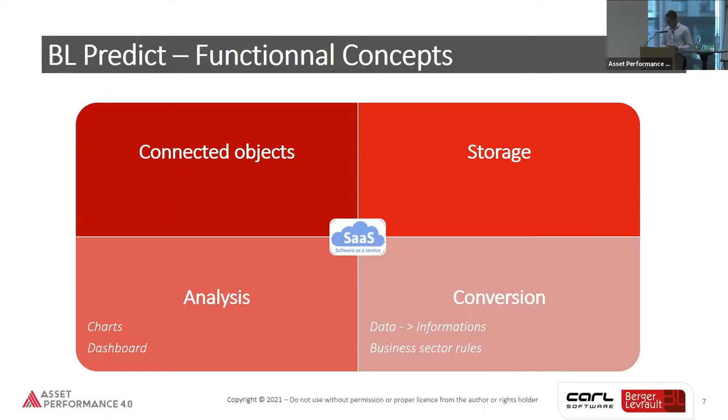And after that, to propose dashboards to make great analysis, or to have some control process on the assets with this data. The specificity of BL Predict is the use of IoT technology, a rules engine and artificial intelligence algorithms dedicated to maintenance. What you see in this slide is an architecture compliant with the new technological principles of the digital age: the connectivity between people, assets, processes, and of course existing IT systems like CMMS, enterprise asset management or other kinds of management systems.

Of course, the use of big data, but not only big data in a classical view, as a data lake with batch flows and business intelligence dashboards. No, in this architecture we have to see big data as the ability to have a stream data flow, to collect data in real time and to analyze the data in real time. Of course, the use of APIs to consume and analyze the data flow, and some business rules connected to the CMMS system.

A focus on the modules and what is necessary to go through maintenance 4.0. First of all, we need to interoperate with the world of IoT and, of course, the world of existing protocols and existing field bus automation.

There are a lot of standards that we can support. All this configuration of the connectivity is managed by what we call device management. The device management helps you, for each asset identified by a unique ID in the CMMS system or the enterprise asset management system, pair it with some sensors.

We can define the technology and the protocol to use to collect the data coming from the sensor. And of course, we can pair this existing sensor on the field with the management objects represented in the CMMS and enterprise management.

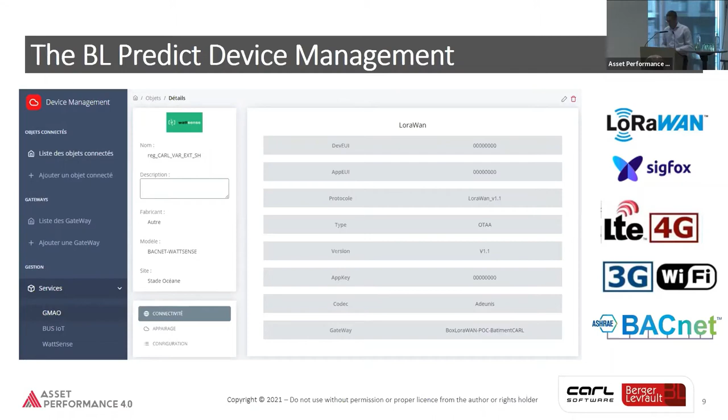By doing this pairing, we are able to control the data flow directly from the sensor to the enterprise asset management system or the CMMS system. I will show you afterward some examples of what we can do with an integration with a CMMS system. So it's quite important to have good device management to go through the Internet of Things.

Of course, we have data, so we have to analyze it and transform this data into information: alerts, events, or indicators. And we have great mixing dashboards to help you understand how an asset works, its health stats, and why it is working this way.

So here, for example, it's a mixing dashboard for an HVAC system, the heating, ventilation, and air conditioning system.

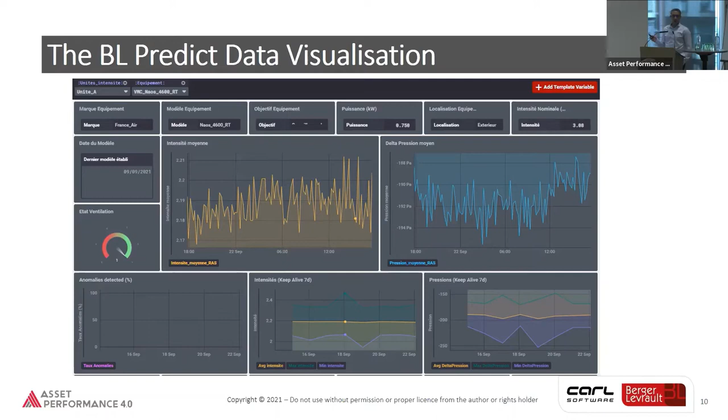And finally, the use of the API to consume data from Berger-Levrault or to consume services coming from other systems like CMMS. At Berger-Levrault, we developed and market a CMMS system called CARL, and we have a first integration with it.

When our customers are in CARL, in the tree structure, to see all the assets that are managed, we can, of course, in real time, see the mixing dashboard corresponding to this asset through the pairing system.

We are able to directly pair some sensors to some measure points in the management system, and to go through conditional maintenance with this pairing.

We are also able to launch alarms or events directly in the CMMS and to start the maintenance process in the CMMS with this triggering.

What's interesting about these alarms and events is that the use of IoT and AI helps you have great qualification of the alarms. So we don't have to fix thresholds or levels for each alarm manually. These thresholds or levels for alarms or events are automatically defined by Berger-Levrault.

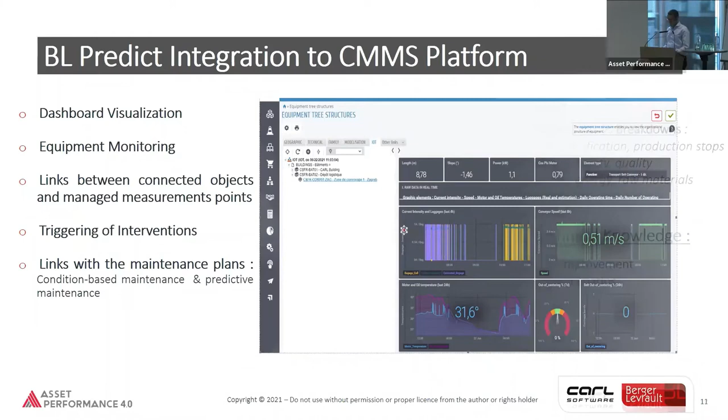So why use the Berger-Levrault platform with the CMMS? What can we do? Of course, we can go through predictive maintenance and predict when a failure occurs. It's interesting to predict when a failure occurs, but that's not the main goal. The main goal is to optimize and find the optimum.

You know there's preventive maintenance and corrective maintenance. Preventive maintenance is quite interesting, you can have zero failure with it, but at high cost. With corrective maintenance, it's low cost, but when a failure occurs, it could be very dramatic, and of course very costly.

So for each use case and for each asset in a specific context, we look for the optimum of maintenance. It's the balance between the maintenance costs, breakdowns, security, and globally the performance of the assets.

Another interesting thing is by making correlations between the data coming from the field, from the sensors, and the knowledge in the CMMS systems, we can increase the technical knowledge of the use of assets in a specific context. By this, we can define maintenance plans adapted to specific degradation scenarios.

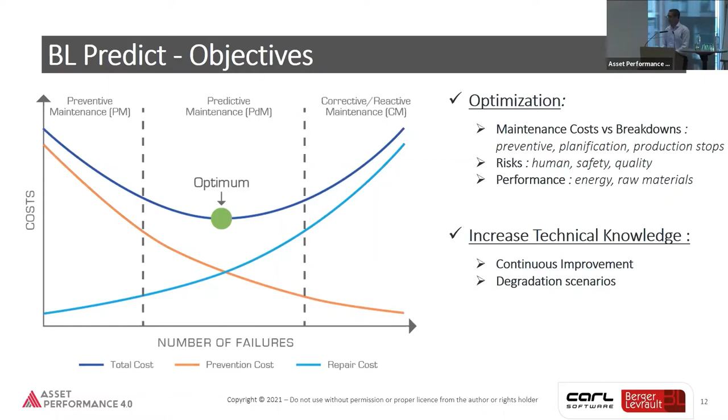A quick focus on the process in Berger-Levrault to do this. There are three main processes.

First, the monitoring. With the monitoring, we can make some auto-diagnosis. With this auto-diagnosis and the knowledge coming from operations and all the data coming from the enterprise asset management or CMMS or other management systems, we can go through prognosis.

And with this prognosis and the financial KPIs of your maintenance activity, we can go through and help give recommendations to help you make decisions on how to build your maintenance plan and manage your maintenance activity to find the optimal.

To do this, there are three main techniques. The first, to make the monitoring processes and the diagnosis, is to automatically detect anomaly in the data. When we mix the data and information coming from BL Predict with the management system, we can go through some classification models to identify some running modes that are bad running modes.

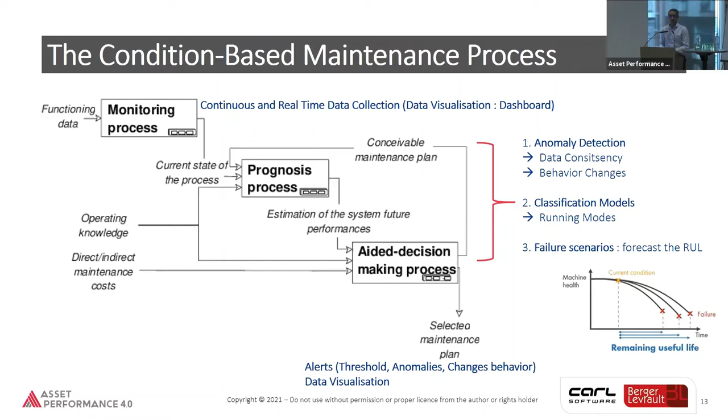So we have a predefined algorithm made by our research team, and it's an agnostic algorithm to detect anomaly and to make a pre-diagnosis based on the data coming from your sensors.

We can, when we detect this anomaly, qualify it in 3 levels. This is an anomaly of the sensor, because the sensors can have anomalies. This is anomaly, it's a local anomaly, so it's an anomaly for example only one signal. And it's a global anomaly, so in fact it's a kind of symptom for the asset or the system.

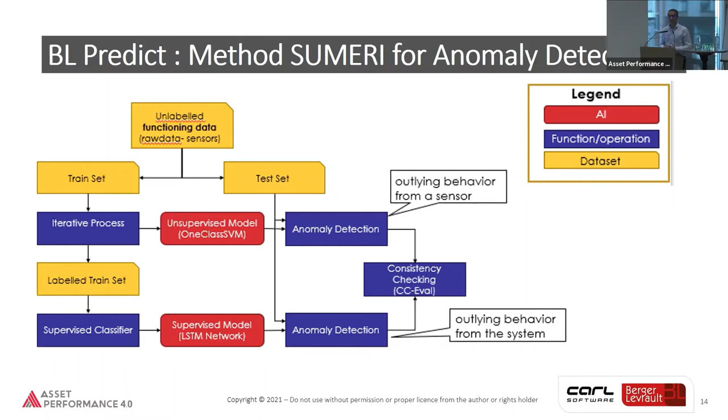Of course, this algorithm, which is called SUMERI, was designed by Berger-Levrault, but you can also use in BL Predict some more classical statistical algorithms that are used by many method and maintenance teams, like ARIMA, to detect change or anomaly in signals and in fact in the behavior of your assets.

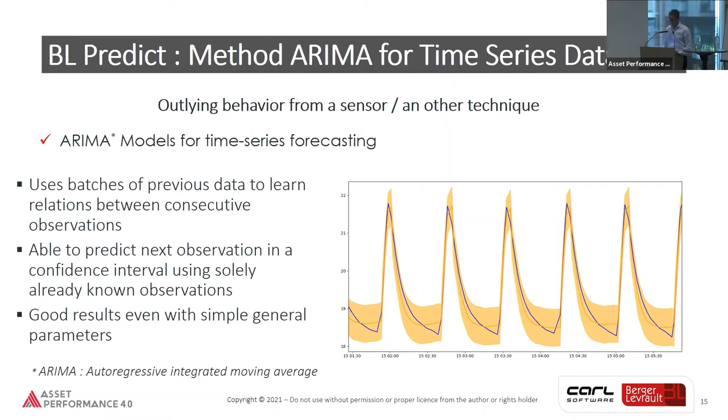To finish on BL Predict, what are the fields of application? So you understand that BL Predict is not a general IoT platform, but a very dedicated IoT platform for maintenance.

So BL Predict is well suited for facility management, because it's coming with predefined configuration, tools, dashboard, and algorithms for facility management - for wastewater, pump follow-up, level control of meters monitoring, or air conditioning systems.

And it is also well suited for some industrial assets, with some algorithms dedicated to vibration, electrical motor analysis, oil control analysis, sound detection, and the ability to detect some behavior of the assets when it is in exploitation.

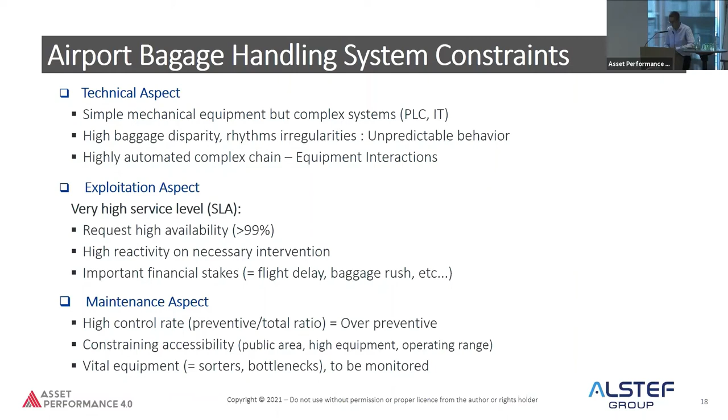Also, as Alstef is the manufacturer and deployer, and as I said, they also market services like maintenance services for the airport baggage handling systems. They are very interested in making new business models to sell to the airports a higher SLA, but also to sell them the ability to make predictive maintenance on the baggage handling systems.

How to do this? We make a partnership with our customer, and we decide to make a good deal. The customer helps us define, in a very pragmatic way, BL Predict, and we deliver them BL Predict as an OEM solution to help us define a new offer, which is called Bag Expert. I will talk about Bag Expert at the end. And this offer will be marketed by Alstef to their customers.

One specific thing in this context is that the airport baggage handling system has a very complex automation, but the assets are quite simple. The majority of the assets of the airport baggage handling systems are conveyors. A conveyor is a very simple system, compared to six-axis robots it's very simple, and it's not very costly. So each conveyor is not very costly, and we have to make this with a very contained budget - we cannot deploy some very expensive technology.

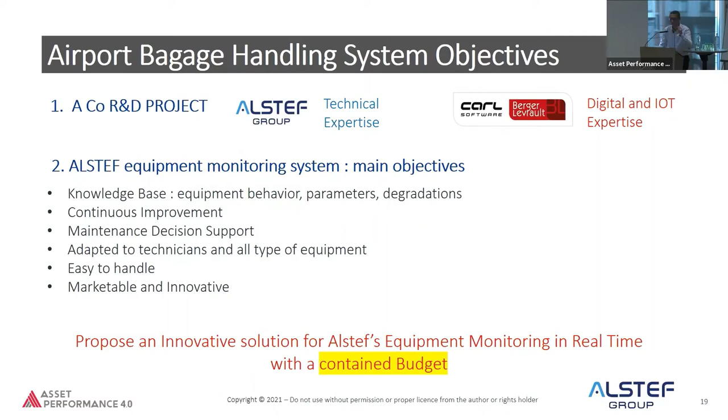The two equipment that we consider in this project are the carousel and the conveyor. The conveyor is mainly in the factory of the airport. So as a user, when we go to the airport, we never see the conveyor, but we see the carousel where we go to get our luggage at the end of the flight.

So we are interested in the two systems. There is some difference between the conveyor and the carousel. The main difference is that the conveyor is very simple and there is a lot of repetition of conveyors, same conveyors in the luggage system. Carousels are more complicated as they are bigger. There is a higher mechanical sensibility because there is a driving chain, many rollers, many moving parts, and they are also visible to the customers of the airports. So it's very important that there is no noise. The conveyor and the carousel must not be noisy, and no failure.

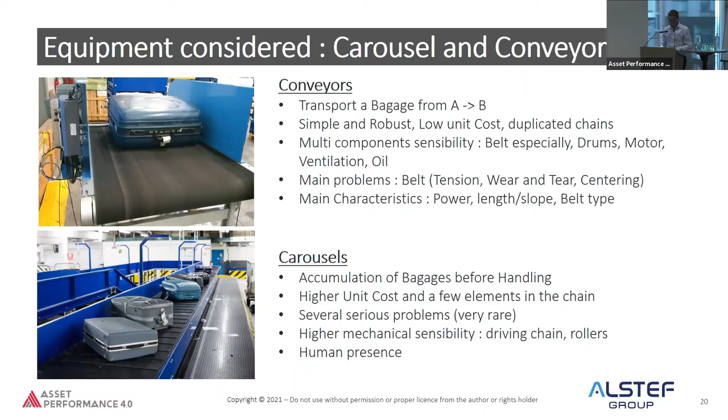To do this, the first step is to collect the data. How to collect the data? Alstef made some choices. The choice was made with our support, but the technology used in the IoT field to collect the data was made by our customers, and they made it regarding two main requirements - three, in fact. The security: the data collection flow must be isolated from the automation flow and must be isolated from the IT system of the airport for cybersecurity reasons.

The costs - as I said, we have constrained budgets, so the cost is very important. And as Alstef has more than 100 systems deployed in the world, the last main requirement is the ability to reproduce the system.

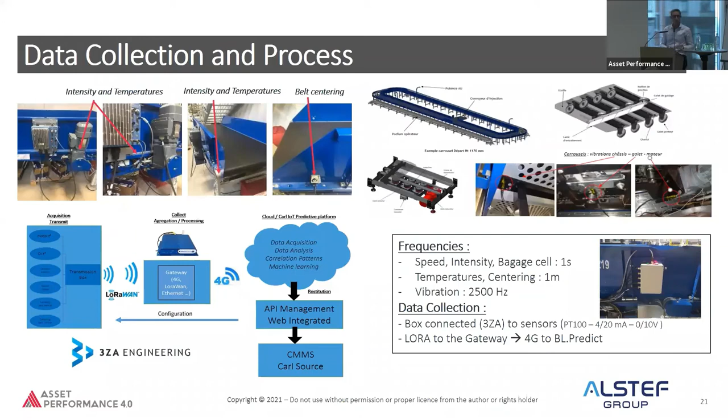To do this, this project, we made it as an IoT project, and I would say a digital twin, or the beginning of a digital twin project. We made it in a new way for digital projects. First, we must sense and understand. After that, we must try on one example. When we try, we must run it on the field on one example, on one prototype. And when this prototype proves its efficiency on the field, we can go and run it to scale.

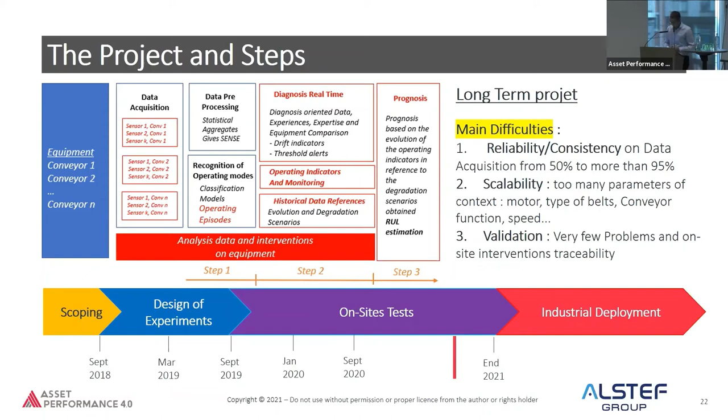So the technology that we used at the first step, now 3 years ago, was not the same as the technology we deploy today in the airports when Alstef goes to scale. So now I will take less than 10 minutes to show you quickly some examples of what Alstef got, what Alstef learned by using this IoT platform and by using this kind of approach for maintenance 4.0.

In fact, what you see here is the choice to link directly the maintenance and the operation. So Alstef considers, with this project, that maintenance and operation must work together.

So with BL Predict, we built, by data modeling and data science, some new maintenance indicators. And these maintenance indicators, as you can see, are built on operating indicators. So for example, they are now able to make conditional maintenance not directly based on some sensors, but on operating indicators, like, for example, the operating time, the effective operating time of the assets, but also the energy consumption of the assets.

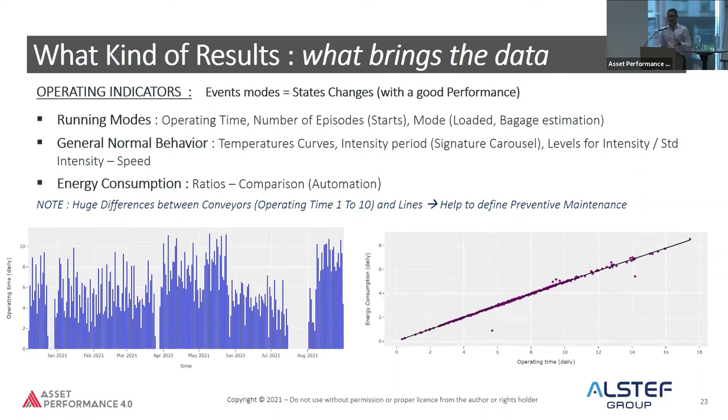So it's a kind of quick learning from the project. What you can also see in this graph, the first graph on the left, is that there is a huge difference in operating time between conveyors, from 1 to 10. Before this project, Alstef was doing systematic maintenance on all the conveyors. So every 6 months, they did the same operating maintenance plan for all the conveyors. With this kind of analysis, we changed our strategy.

Another quick win is the use of anomaly detection on the data. Based only on the electrical intensity of the motor for the conveyor or carousel and the speed of the belt, we combine these two measures. We run the algorithm for anomaly detection, and here we can see that there are a lot of anomalies coming from operation: baggage that is blocked, baggage jams, baggage that is injected very violently onto the conveyor.

And what we can see is that the overload coming from the operation is due to the automation process, in fact. This overload has an impact on how the assets operate and are used, and in fact reduces the useful lifetime of this conveyor. For example, a lot of jams. The consequence is a lot of baggage injection, stop and go, stop and go. And this repetition of stop and go is not very good for the conveyor.

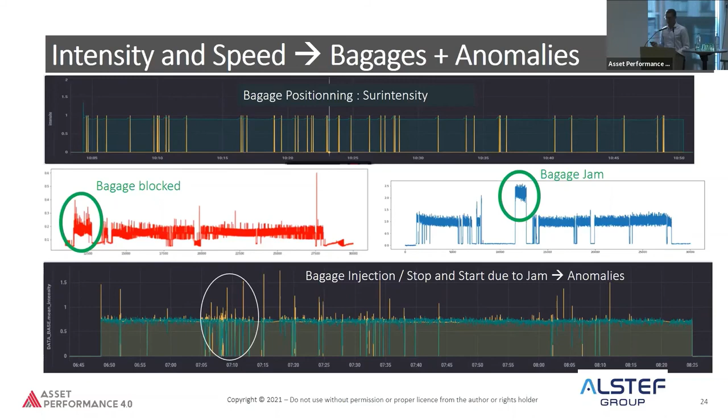Another example: we try to estimate the number of baggage transported by each conveyor. It is too costly to deploy control sensors on each conveyor, so we build an AI model to estimate this. And what is interesting is the ability to build a new indicator, that is the energy cost for each baggage. And with this energy cost, if we look at the drifts, we can adjust the maintenance plan to reduce the energy cost for each baggage.

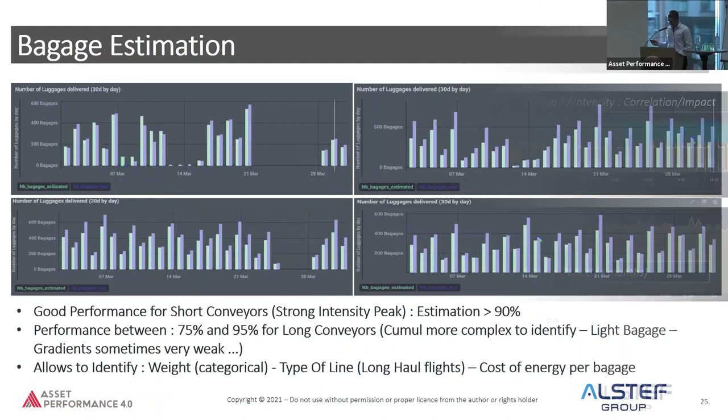In our case here, we try to estimate the number of baggage loaded in a carousel. In theory, for each carousel, where people take their baggage after the flight, the automation is made to have a maximum of 25 baggage. As you can see on the graph, we regularly exceed the 25 baggage.

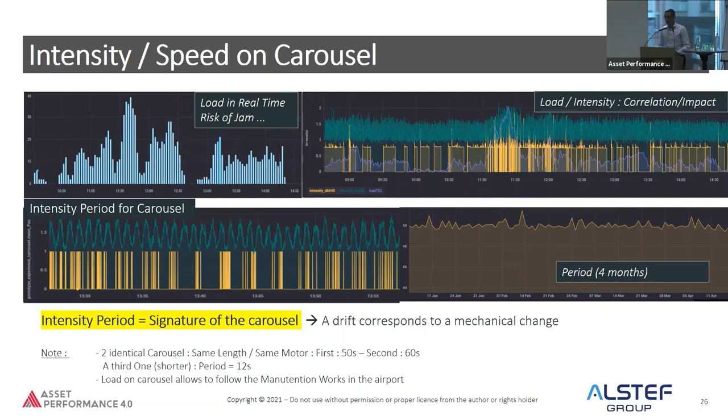The impact of this is on the bag injection upstream, which is going to have some phases of, how to say, very choppy operation. Okay, so stop and go, stop and go, which is not very good and has a bad impact on the remaining useful lifetime. So here I show you some new operation indicators.

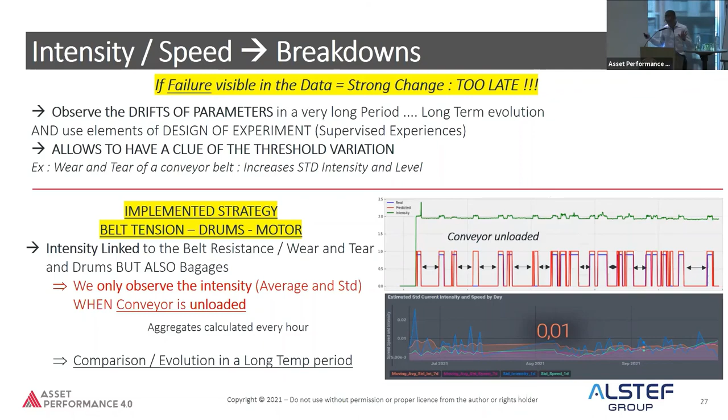Now, how to detect breakdowns. The main thing is that to detect breakdowns, we have to see the drifts. And to see the drift, we have to do it in comparable operating conditions. So we can only do it in a luggage system when the conveyor is running empty, because when it's running with luggage, there is high variability due to different weights and types of luggage. So we work to neutralize this variability. We do this with the intensity and speed, but also with the temperature of the motor and the oil.

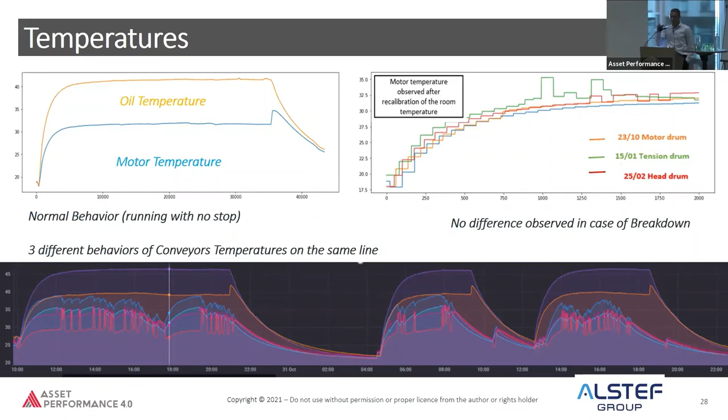In the first step, we try to do this by engineering, which is the graph on the right at the top. We do not detect any specific signature for anomalies or failures regarding the temperature. By using automated algorithms, on the graph below, we detect that there is a signature linked to the stabilization of the temperature and the gradient of the temperature at standstill after a workload.

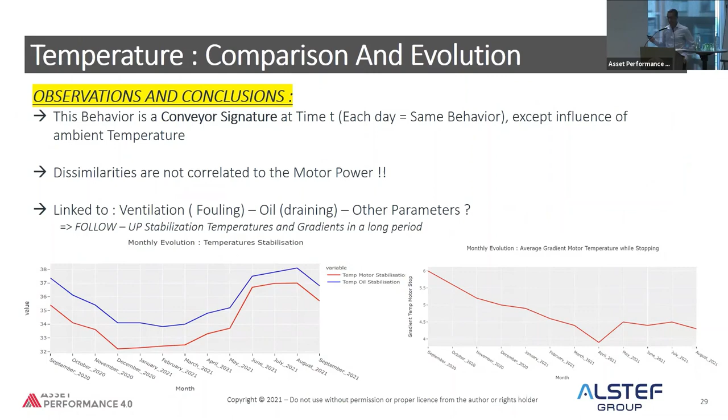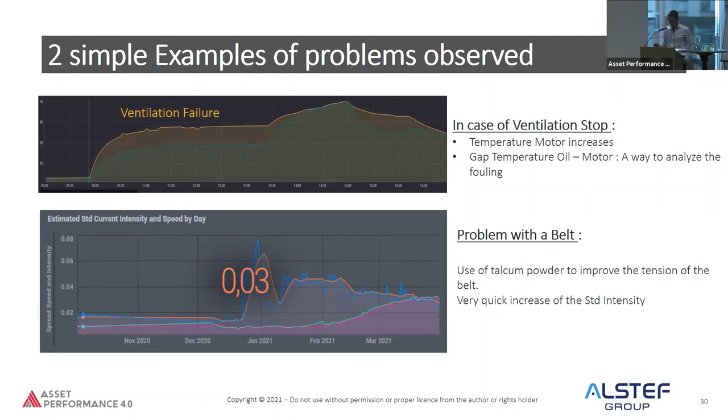So we build a new indicator based on this, and we can look at the drift of this indicator. And by looking at the drift of this indicator, we are able to detect two kinds of new problems and to prevent them: ventilation failure of the electrical motor and some problems with the belts of the conveyor.

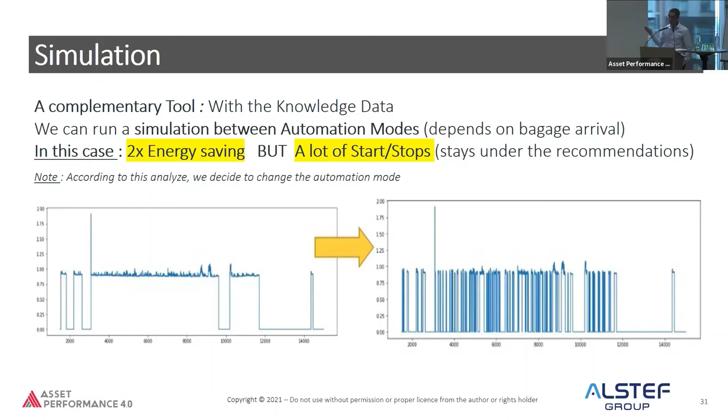And on the right, another automation mode, which is called the wave concept. So when there is no luggage, the conveyor goes up and down according to the placement of the luggage. And there is a lot of stop and go, and we can prove that we can save 2x energy by changing the automation.

To finish, the main benefit for Alstef, in fact, is the long-term benefits. There are some quick wins. I'm not going to comment on all the quick wins, but the long-term approach can help them adjust the preventive maintenance and save a lot of money, and also improve the design of conveyors and carousels.